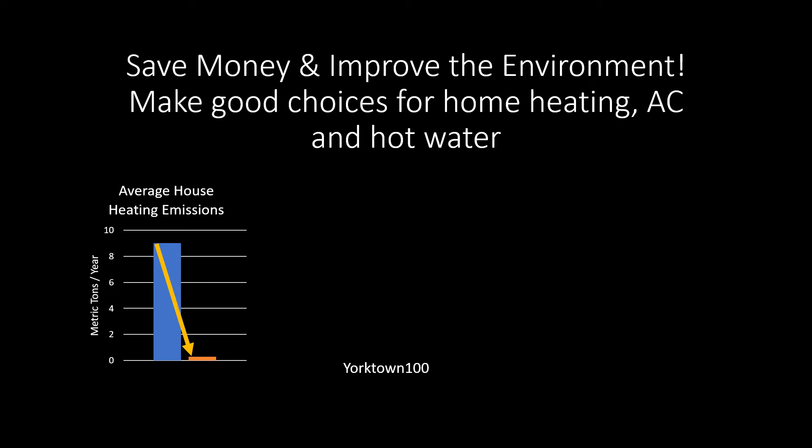Home heating contributes about 9 metric tons per year of greenhouse gases per household. We can bring that to essentially zero with the right choices. Join us in a simple 4-step program. 1. Leverage a home energy audit and reduce your consumption. 2. Purchase clean energy or install rooftop solar. 3. Make a plan for your systems and install a high-efficiency heat pump when it's right for you.

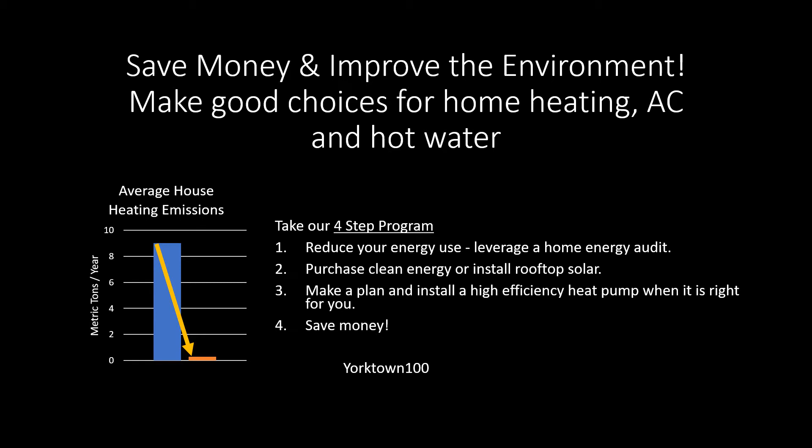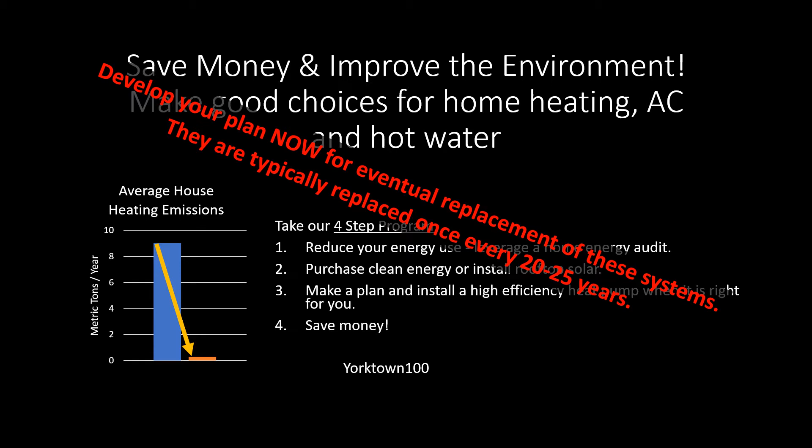And 4. Save money. Home heating, cooling, and hot water systems typically last 20 or 25 years. And our goal is to eliminate greenhouse gas emissions within 20 years. So it's really important to have a plan and make the right choice. Take the time now to study options and develop your plan. Don't wait until the last minute and your system fails and you're forced to make a quick decision. You have an opportunity to make the world cleaner, safer, and sustainable, and save money in the long term.

How can we heat our house? Well, one option is to burn something like oil, gas, wood chips to make heat, but that's always going to produce carbon dioxide and other pollutants. You could also use clean electricity to make heat by resistive heating, like in a toaster. That's really the most expensive to operate, and now it's obsolete, although some of these old electric baseboards are still in use. The amount of carbon emissions from a system like this would depend on how the electricity is produced.

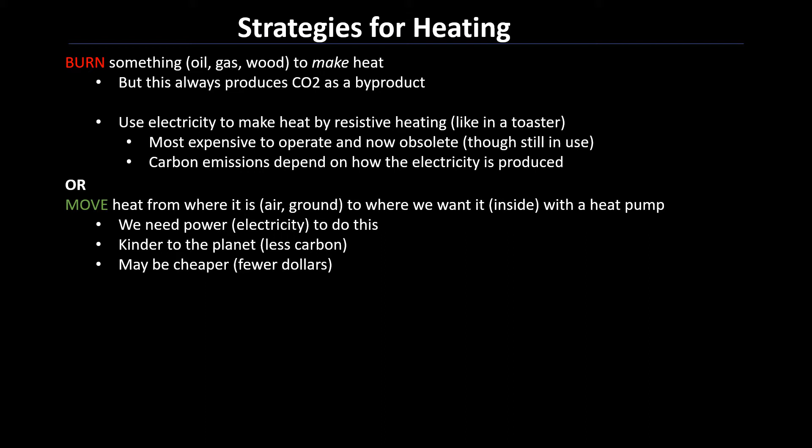A better option is to move heat from where it is, whether it be in the air or in the ground, to where we want it inside our homes with a heat pump. We need electricity to do this. It's kinder and gentler to the planet. It may be cheaper depending on your current heating system. And the electricity can come from a renewable source, as we mentioned earlier. And the system of a heat pump will do dual duty and act as a traditional air conditioner in the summertime.

Another option is to use sunshine directly. A passive solar house is really the best option. It's great for new homes, but it's not easily retrofit into existing homes. So we're not going to focus on that today. We should choose a system that adds no carbon dioxide and minimizes other pollutants. Is it really possible to choose a system that's clean and saves money? Well, let's find out.

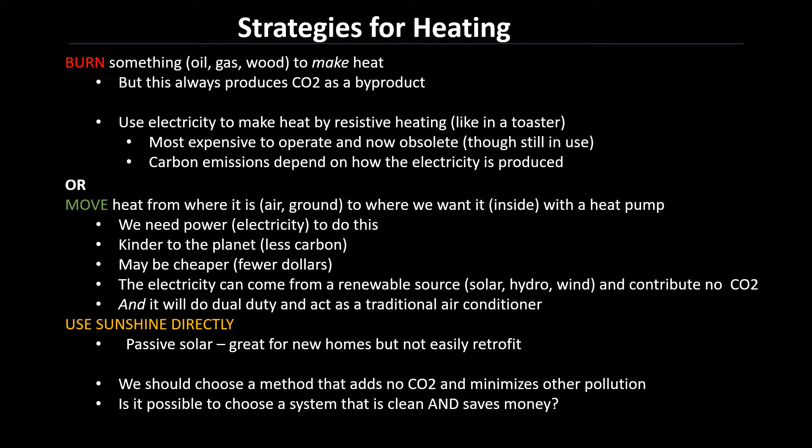First things first, let's take step 1, and that is to minimize the amount of energy and understand the energy use in your household. Get a free energy audit. You can visit the NYSERDA webpage to find details on how to do this. You'll probably find that you need to insulate better, minimize leaks, perhaps install a smart thermostat. You need to maintain your equipment with tune-ups and always change your filters regularly.

You should pay attention to what spaces really need to be heated or cooled, and don't condition spaces that you're not using. Don't leave doors and windows open with the heating or the air conditioning running. I do not recommend you use an open fireplace. It pulls more heat out of the house than it actually generates. But if you do use one, close the damper securely when you're finished. All of this can impact the size of the equipment needed and future heat pump requirements.

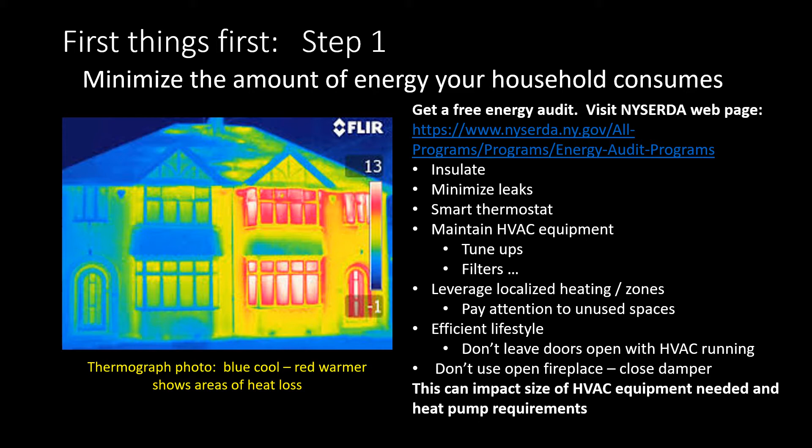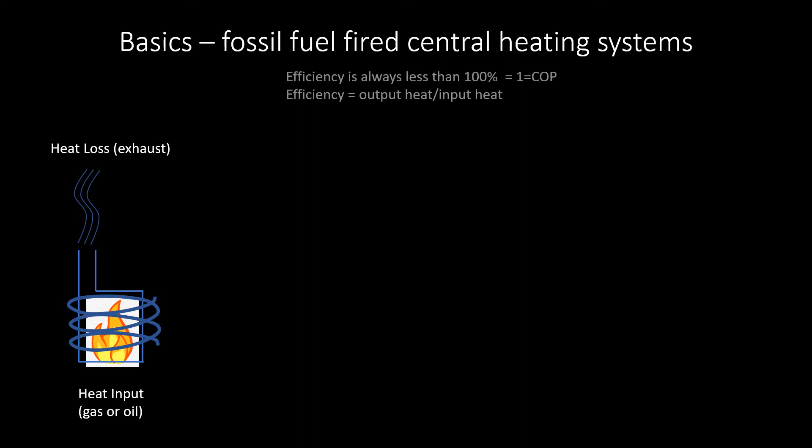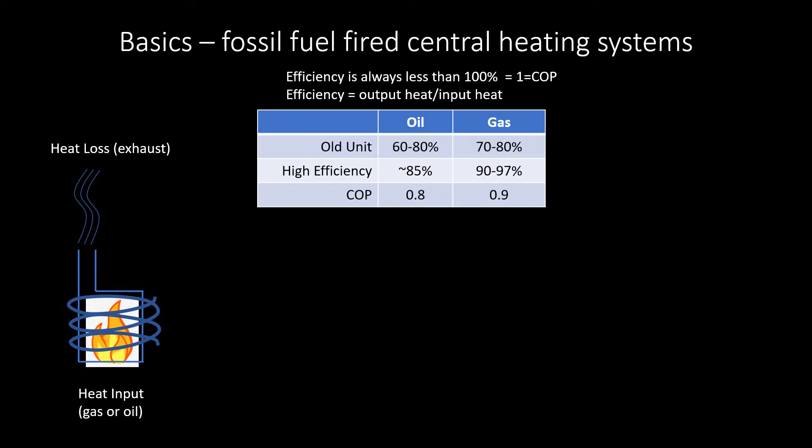We are going to step back and discuss the efficiency of fossil fuel-fired heating systems. All combustion sources produce CO2 and other toxic gases. These are vented outdoors via a chimney or pipe and always contain heat. Because of that heat loss, the efficiency of these units is always less than 100%. By the way, another way to quantify efficiency is coefficient of performance, or COP. That is simply heat output divided by heat input and is 0.8 or 0.9 when rounded for these cases. These heating systems typically distribute heat through the house either through hot water and baseboards or hot air and ductwork.

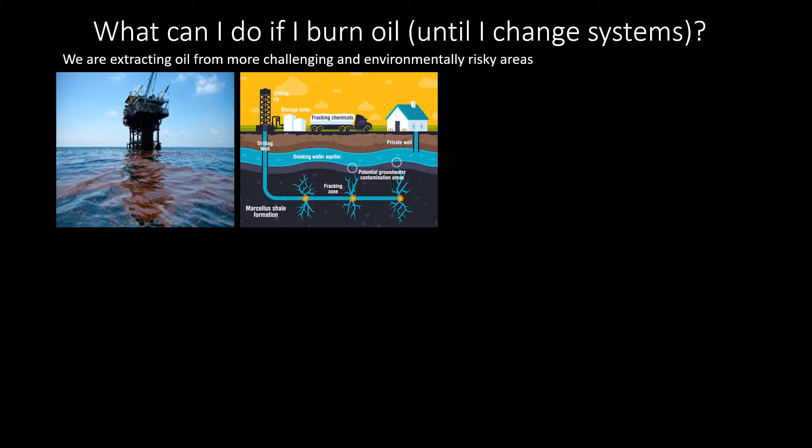Over the years, as we have continually extracted oil and gas from the earth, the reserves are getting harder and harder to reach, and often in more environmentally sensitive areas like our oceans. In addition, a technology called fracking is used to extract more from existing wells. Fracking involves pumping water and chemicals under extremely high pressure into the earth until cracks and fractures occur. These allow more of the trapped fossil fuels to escape, but cause other consequences such as groundwater pollution and methane leaks, which is a worse greenhouse gas than CO2, by the way. So, bottom line, extracting oil and gas results in significant environmental consequences in addition to CO2 emissions. What about biodiesel?

Well, you can't burn corn stalks or soybeans in your home or your car, so a lot of processing is needed, and it consumes fossil fuels. The ideal biodiesel would grow in a 1-year life cycle, yield far more energy than required to make it, and require no fossil fuels to grow, harvest, and process. This is not yet the case.

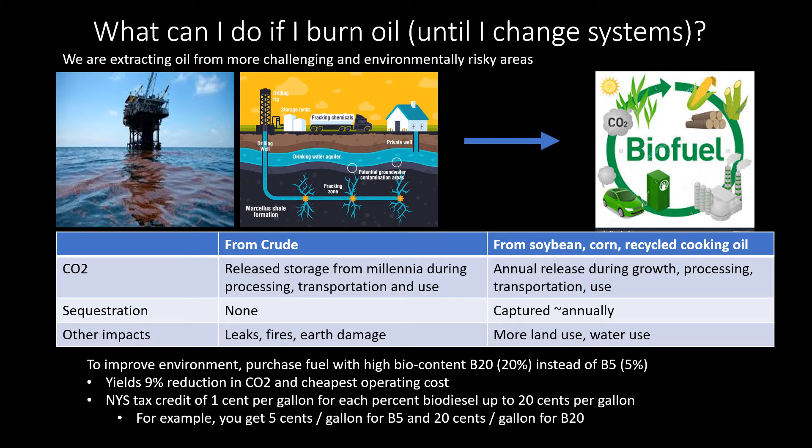However, properly produced biodiesel blend has been shown to reduce carbon emissions in total, and New York State provides a tax benefit to those who use it. We recommend using 20% biodiesel, known as B20, as it is the least net expense to you and has a net carbon dioxide benefit. And it avoids some of those other negative environmental consequences we talked about with fossil fuels. Note, it is not recommended for outdoor storage tanks as it may partially solidify in extreme cold.

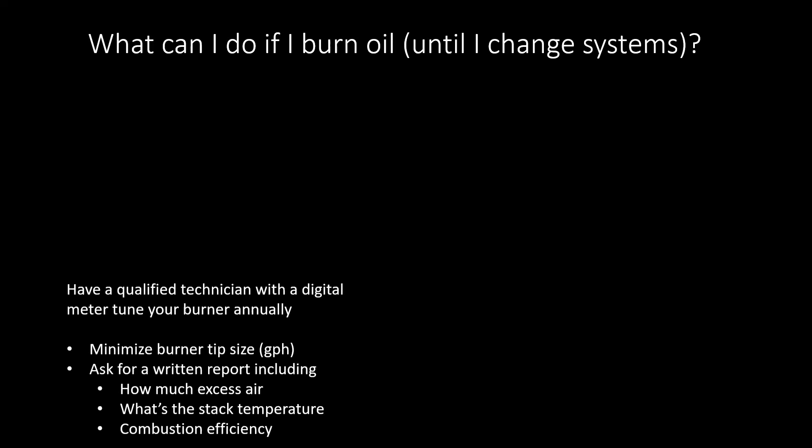While still burning fuel oil, it is imperative to keep your burner tuned properly. Some might question if the company that sells you oil is motivated to minimize your consumption. I recommend you get a written report from a company that utilizes the latest technology for measurements, such as a digital meter that measures oxygen, unburned fuel, and stack temperature. After you get the report, I suggest you discuss it with neighbors and experts.

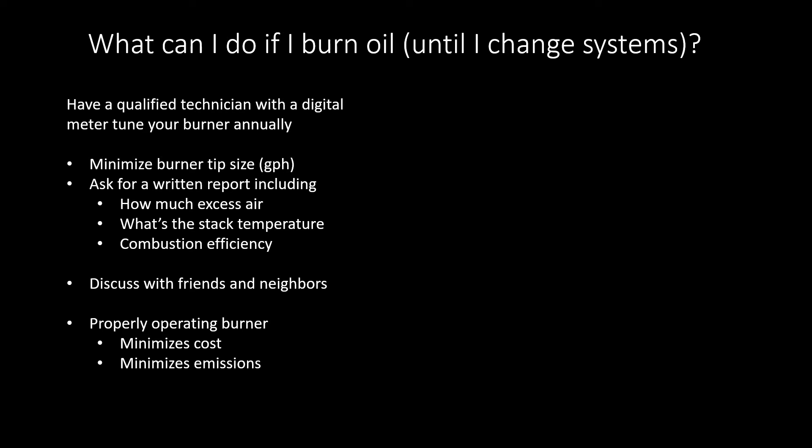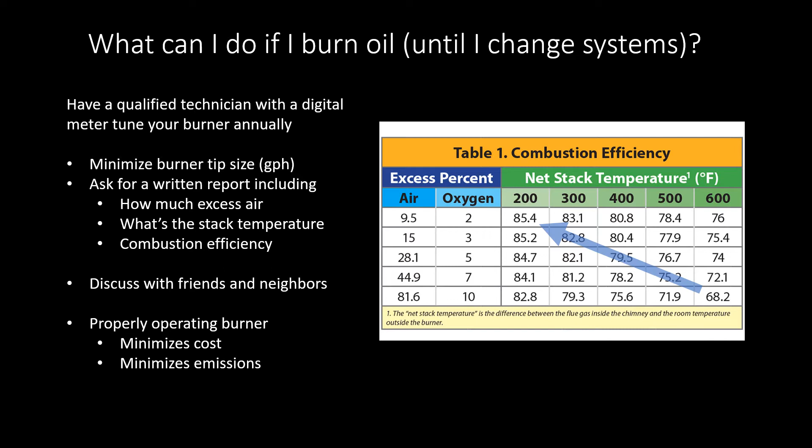Oil burners have improved over the years, but will yield efficiency in the high 80s at best. As you can see from the table, you want to minimize stack temperature and excess air. Minimum stack temperature for residential systems is around 350 degrees. I would be concerned if it is above 500 degrees. Keep in mind that all that heat is just thrown out through your chimney. The person that tunes your boiler adjusts the oil burner flow, which is the tip size and excess air, and has a big impact on your household emissions.

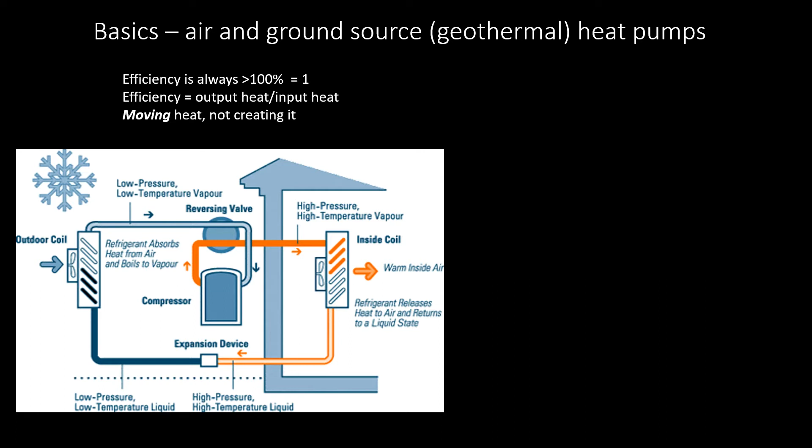Now let me introduce you to heat pumps. As you know, typical air conditioning extracts heat from inside and moves it outside. An air source heat pump operates just like your air conditioner in the summer, but in the winter it operates in reverse and extracts heat from the outdoor air and moves it inside. In all cases, heat pumps operate at efficiencies greater than 100%. These units are very efficient and operate between 160 and 500% efficiency. That may surprise you, but keep in mind we are talking about moving heat, not creating it.

Let me give you an example. Say your house is 60 degrees inside and the weather outside suddenly warms up to 75 degrees. You open the windows and the house warms up to 70 degrees. The efficiency of that activity was perfect and obviously much greater than 100% since you used no electrical energy and used the heat in the outdoor air to heat your house. The heat pump does essentially the same thing by extracting and consolidating heat from outdoor air and moving it inside, but it can pull heat from fairly cold air. One more thing about the efficiency of air source heat pumps. It goes down as the temperature goes down. That's why I show the range of 160 to 500% efficiency.

Ground source heat pumps operate on the same principle. They take advantage of the constant temperature in the earth to gain efficiency. They require that a well or trenches be excavated and operate around 430 to 450% efficiency. They have a dual benefit of saving energy in both heating and cooling situations.

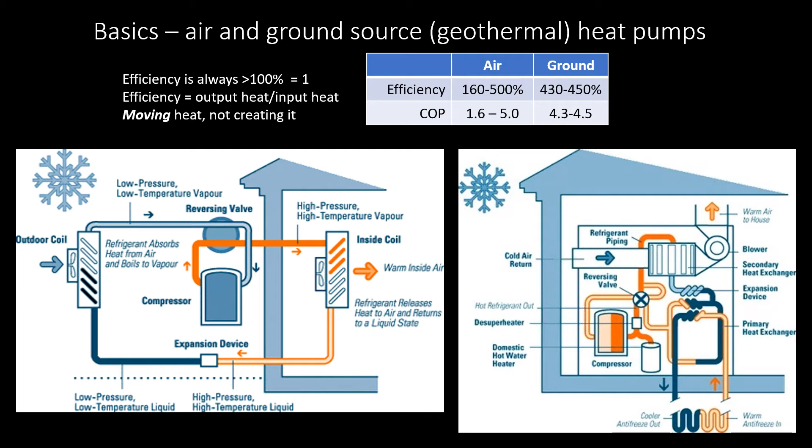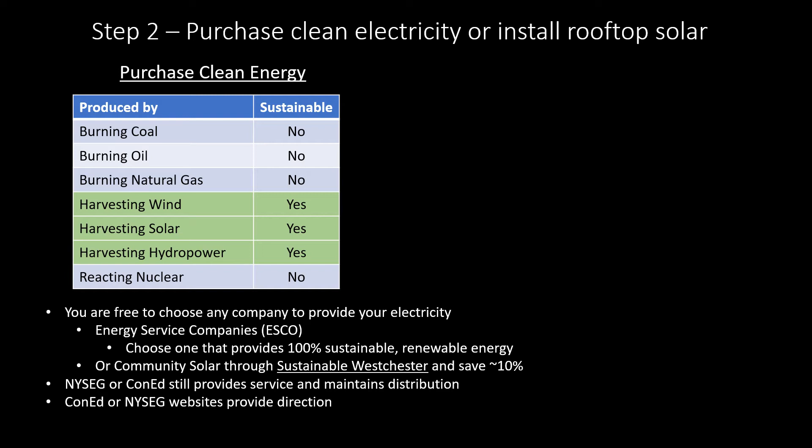As we migrate to electricity to heat our homes, it's important that the source of that electricity be clean and renewable. Wind, solar, and hydropower provide clean, renewable energy. You are free to choose any company you want to provide your electricity. These companies are called energy service companies, ESCOs. Choose one that provides 100% sustainable renewable energy, or you may choose community solar, which is available through Sustainable Westchester, and in that case you can save 10% off your electric bill. In all cases, your utility will still provide the service and maintain distribution. The Con Ed or NYSEG websites will provide direction.

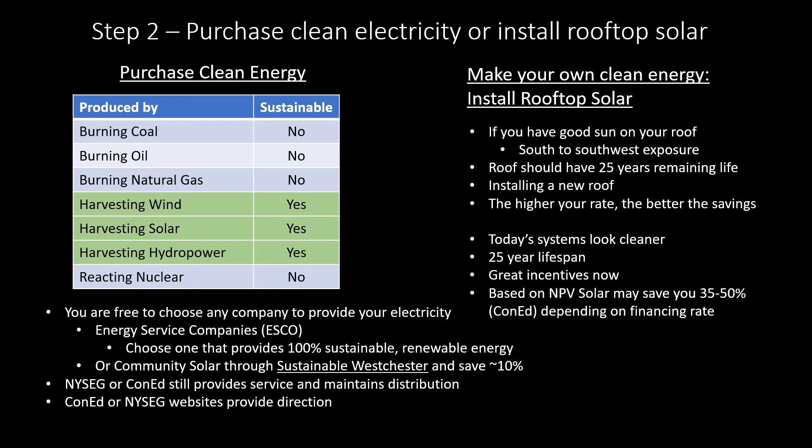Have you considered installing rooftop solar? If you have good sun on your roof and a south to southwest exposure, if you have a roof in good shape with say 25 years remaining on it, or if you're installing a new roof. And if you pay a high utility rate, the higher the rate, the better the savings. Today's systems look cleaner. They have a 25-year lifespan. There are great incentives now. I've looked at net present value of a solar system in Con Ed territory, where we have some of the highest utility rates in the nation, and it will save 35 to 50% of energy costs depending on your financing rate.

Now let's talk about a subject near and dear to all of us, operational cost. This is what you pay month after month and year after year to heat your home.

To make it simple, I have calculated all costs relative to the cost of oil heat. So the cost of oil heat relative to the cost of oil heat is 100%. If, for example, you heat with propane, your cost will be about 40% more. If you heated with old school baseboard electric, as we discussed earlier, it would be almost triple.

High efficiency gas is currently good from a cost viewpoint, but results in CO2 and methane emissions, both greenhouse gases. It is produced with fracking, which has many negative environmental consequences. Today's gas prices are the lowest they've been in the past 20 years. In 2005, for example, gas was about 10 times more expensive than it is today. It is uncertain what it will cost in the future.

For all electric systems, I figured that the homeowner purchases from a clean ESCO, as we previously discussed. You notice that for air source heat pumps, I show a range. This is because the efficiency of air source heat pumps varies with outdoor temperature. Thus, depending on the average temperature of a given winter, the cost can vary. I'll talk about this more on upcoming charts. The efficiency of other fuels and geothermal for this calculation are constants.

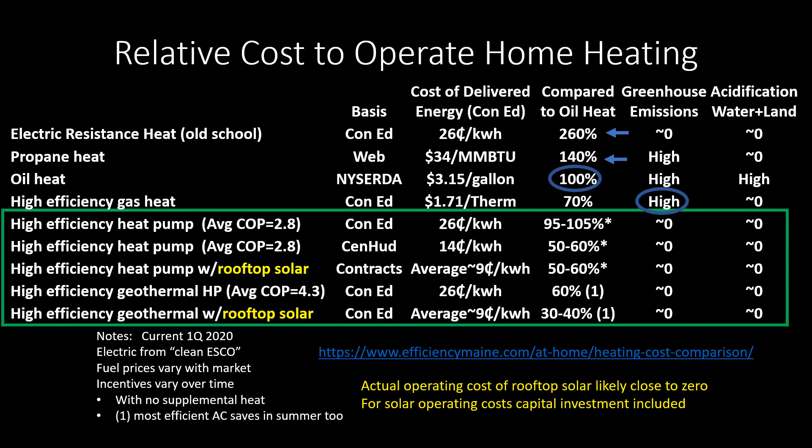Geothermal provides excellent operational costs and is not subject to outdoor temperature variations since it operates below the surface of the earth where the temperature is relatively constant. Combining geothermal and rooftop solar will result in the lowest operating cost and has essentially zero emissions. The time to plan and understand all of this is now.

Now let's examine the relative cost of installation. You can see that a heat pump will cost somewhat more than replacement of a furnace or central air conditioning. It may well save you operating costs, however, and if powered by clean energy, will produce no carbon emissions. I would never buy another plain air conditioner again.

I've shown some ballpark costs for geothermal. There are great incentives for this type of system, and it may be right for you. It does take up more space in your utility room, but saves money when it's very cold or very hot outside. Rooftop solar is often a wise and cost-effective investment, particularly if Con Ed is your supplier.

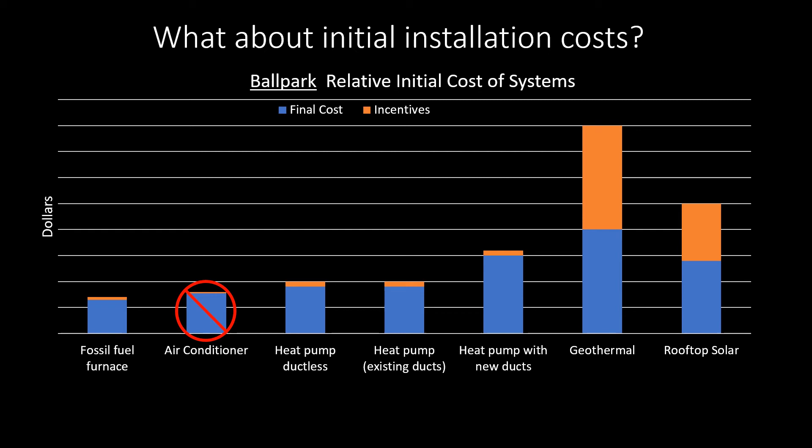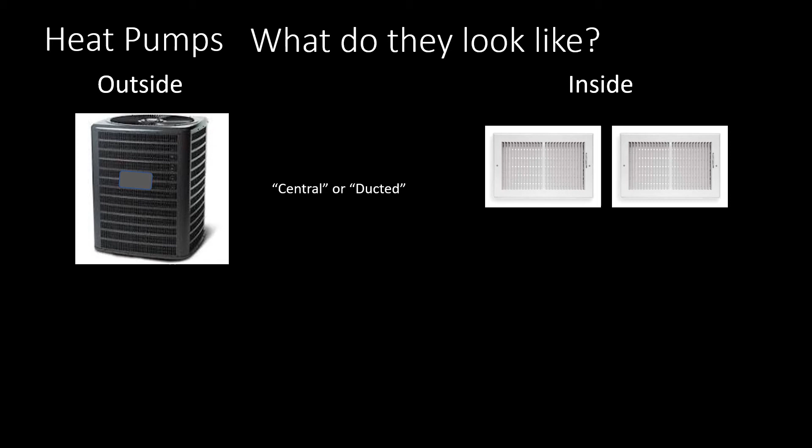Now, let's turn our attention back to heat pumps. What do they look like? Well, they just look like air conditioning systems. If you have central air or a ducted system, the outside and the inside will pretty much look the way it does today. If you have a mini split or ductless system, they will look the same as they do today. However, again, they can operate either pumping the heat into the room or pumping the heat out of the room.

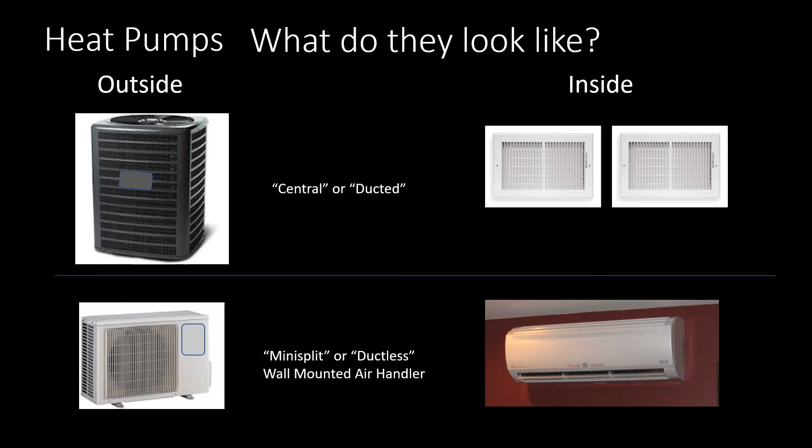Let's talk about what equipment you'll need to migrate to a cold climate heat pump. This depends on the starting point. What system do you have currently installed? If you have gas or oil-fired hot air, you simply need to install the heat pump, which again functions as your air conditioner.

If you have gas or oil baseboard hot water or electric baseboard, that means you don't have ductwork. You'll need to either install a fully ducted system or a number of wall-mounted air handlers to distribute the air within your house, and then the heat pump. This will be a more expensive transition.

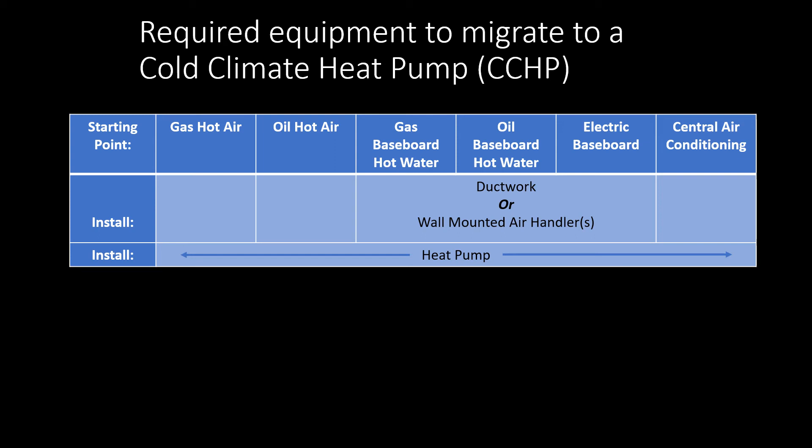But if you have central air conditioning, regardless of what type of heat you have, you should install a heat pump that will provide you heating and cooling through that single system. You might be thinking, perhaps you don't want to replace an entire system. Maybe you have a fairly new system, but you'd like to do something in the right direction.

Is there some sort of hybrid? Well, the answer is yes. A heat pump powered by clean energy can work with and complement your existing system. It'll reduce your carbon emissions and potentially save you money.

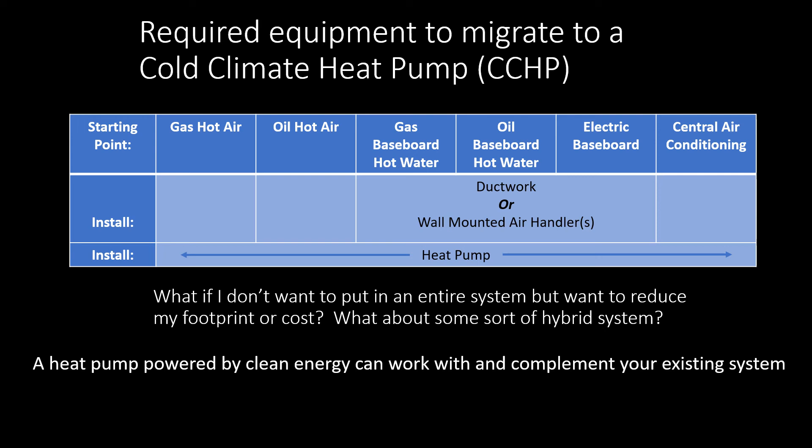Now we're going to talk about efficiency and what you would specify if you're purchasing a heat pump. In all cases, a heat pump also functions as an air conditioner, and you will need to specify a cold climate heat pump if you're going to use it for heating.

The efficiency of these units drops as the outdoor temperature goes down. And to compensate for this and sort of give you an average number, they are now rated by Heating Seasonal Performance Factors, HSPF, and that's in BTUs per watt hour. You would simply multiply that number by 0.29 to get an average coefficient of performance. It's sort of like the difference between degrees Fahrenheit and degrees centigrade. It's just a conversion factor.

In all cases, higher means more efficient. However, more efficient units cost more. The range for heating HSPF goes from about 8.5 to 15, and I would recommend that you purchase a unit greater than 10. For cooling, the seasonal energy efficiency rating varies from 15 to 42, and I would recommend at least 20 for that number.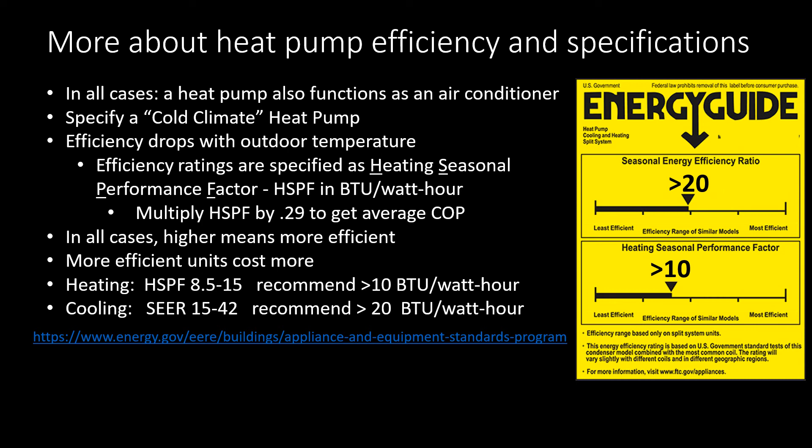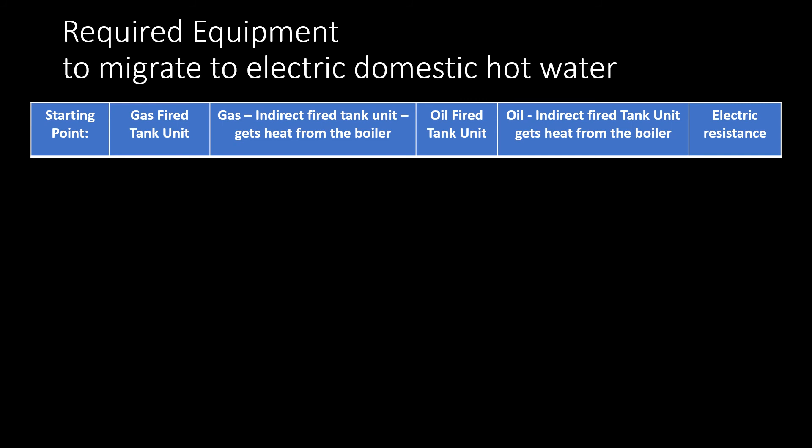Keep in mind, after you choose your heating system, you will still need a plan for hot water. Heating systems and hot water systems often go hand in hand. Sometimes they're integrated, sometimes they're completely separate. So you'll need to make a choice as to how to provide hot water. For many people, the heat pump hot water heater will be the best option. And by the way, it also acts to dehumidify your basement. It'll operate at 2 to 3 times the efficiency of a regular resistance hot water heater.

However, if you use very little water, that old style resistance hot water heater may be fine for you. You could also go with point of source electric tankless water heaters, or you could choose a solar thermal hot water system. However, these systems have been falling out of favor in recent years. The economics of your choice depends on site-specific conditions and the amount of hot water used.

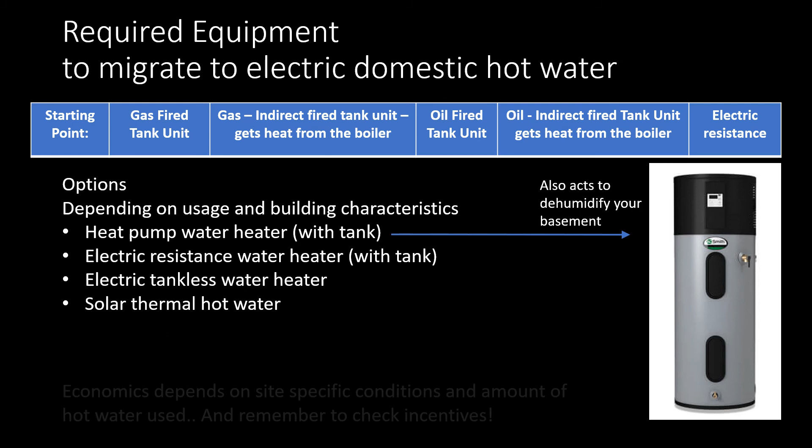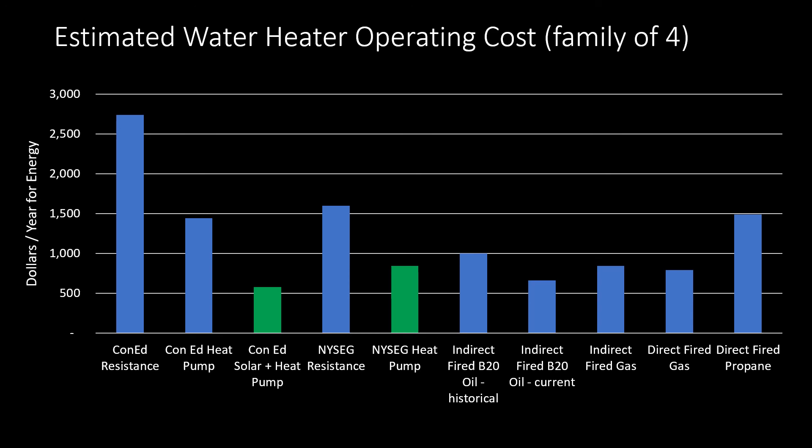And remember, check incentives. I have examined the cost for hot water for a typical family of 4 who are pretty energy conscious. You can see that it may cost from about $500 to $2,500 a year depending on your system and your utility. There are 2 great clean solutions, rooftop solar and a heat pump water heater if you're in Con Ed territory, or a heat pump water heater in areas serviced by NYSEG. The most expensive to operate are resistance, electric, and propane systems. Note that current oil prices have been dramatically lower due to the COVID situation and may not extend into the future.

This is a photo of an actual house in Yorktown Heights, New York. It was built about 4 years ago. It's very well insulated, has rooftop solar, heat pumps for heating and air conditioning, a heat pump hot water heater, and energy efficient appliances. Look for the Energy Star label. Bottom line, the house is very comfortable. It costs about 15% more than standard construction initially, but it makes more energy than it uses and emits 0 greenhouse gases for the life of the home. That's about 225 metric tons saved over 25 years.

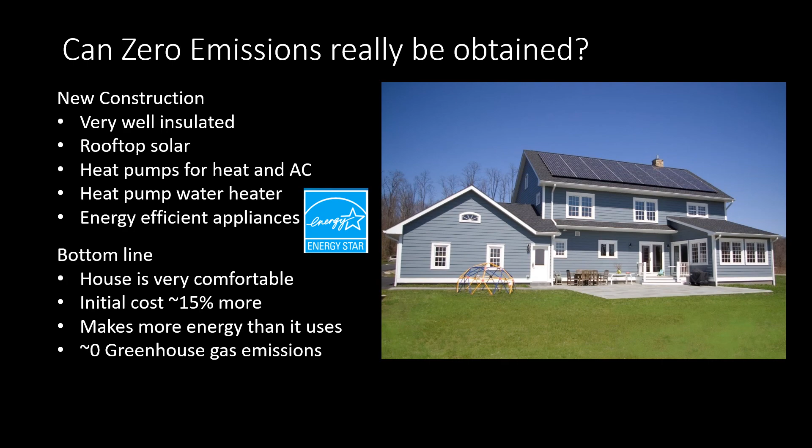Wow. Now it's time to talk about step 3, your plan. What should it look like? It's simply all the activities with their associated time frames. Each home will have a unique plan. I would recommend getting your home energy audit done right away. Have your friends and neighbors do the same. Then you can all discuss it as a group and learn from each other.

Switching to a clean ESCO may or may not save you money, but it will reduce your carbon emissions. I added a line to remind you to consider your emergency generator. If you switch to all-electric heat, you will need a larger generator. I recommend you revisit your plan annually. Kick it around with your friends and neighbors.

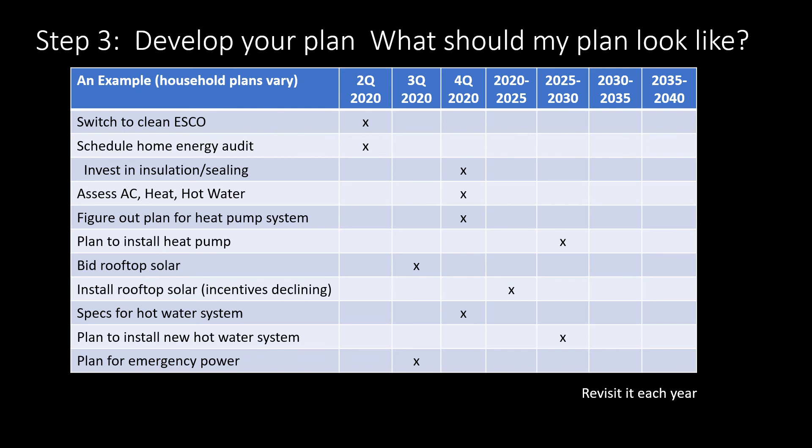Now it's time to take this journey together. Let's make good choices for a sustainable future. Let's each and every one of us eliminate that 9 metric tons per year of household emissions. Let's take advantage of rebates and incentives. While you do this, get good advice, qualified contractors, and always get multiple bids.

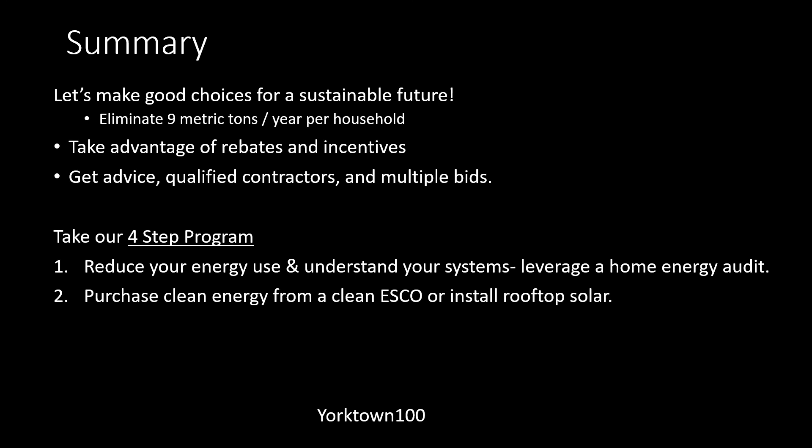Take our 4-step program. 1. Reduce your energy use. Leverage a good home energy audit. 2. Purchase clean energy from a clean ESCO or install rooftop solar. 3. Make a plan and install a high-efficiency heat pump when it's right for you. And 4. Something we can all enjoy, save money. I look forward to taking the journey with you.